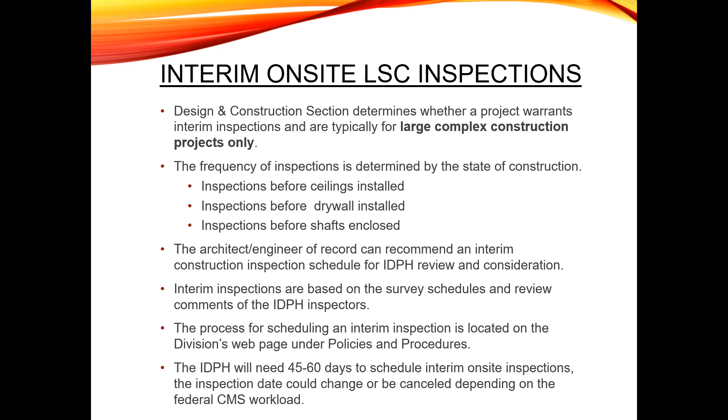So if we get a cert pack in here that has issues with it, they all need to be resolved. Now, it's case by case also. If there is a time crunch, we can look at how that impacts the cert pack review and the on-site request. We have made accommodations in the past for an emergency need, say an OR needs to be open, or an ED department needs another phase looked at, with this season coming in with COVID and the flu season impacting the ED departments at all the hospitals.

But before any occupancy can be granted, either temporary or final, all the issues must be resolved at the end, okay? I just want to make sure everybody understands that. Next slide.

Requests for inspection, that's kind of what we've talked about. The cert packs are reviewed for current forms. That's what Dave does. He'll look through it to deem it complete. He'll make sure that all the certifications have signatures. We do not accept typed names as if we're typing on the computer, but we are accepting electronic signatures, such as DocuSign. I know there's a few out there. As long as it's an electronic signature that's generated, we would accept those on documents. If there's any question, Dave may call and ask, just to make sure.

After the inspection has been internally scheduled, design and construction will contact the project architect or engineer to set up the inspection date and time. If there's a balance due for a fee, say the change orders exceeded what the fee was originally, there could be a balance due. We potentially could do an inspection, but no occupancies will be granted until the review fee is received by the department. Okay, next slide.

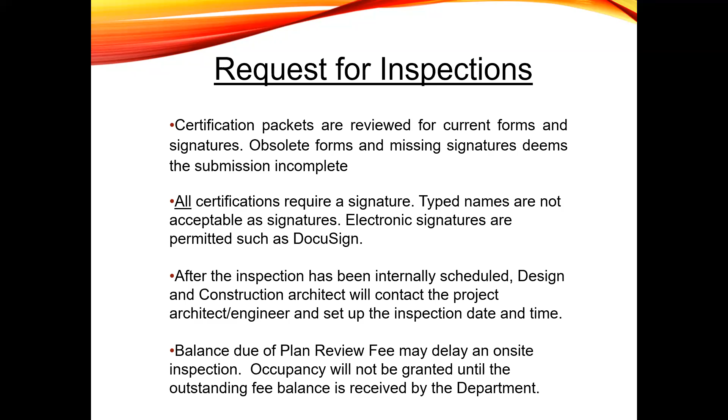Project inspections for licensure are all announced. Only the Centers for Medicare surveys at hospitals are unannounced. But we in licensure always announce our inspections because we want as many people there as we can have, from the contractors to the architects. Who should be at the inspection? It's not required, because we can't mandate anybody to be there, but certainly the owner, architect, engineer of record, the contractor, and any subcontractors.

After the on-site inspection is conducted, a letter would be sent to the architect or engineer outlining any deficiencies that we may have found on site. And we have to have that letter out within 5 working days. Most of the time, the corrections are made by the time we get back to the office, if it's traveling from Chicago. So you send us an email, and the letter may not go out if you've taken pictures, depending on what it was.

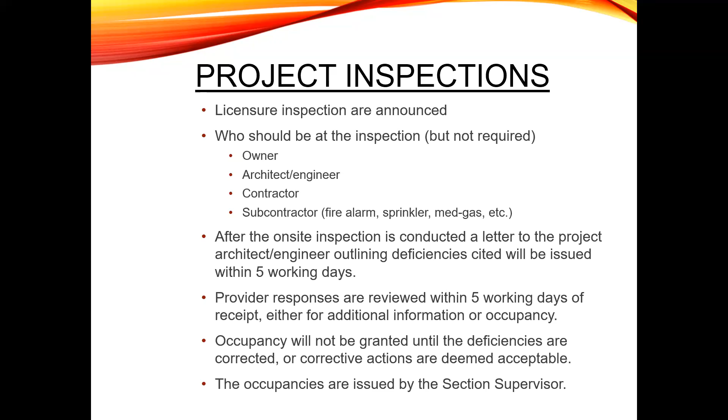If you have a work order, change order, something that you can forward to us with photographs, we would accept those. The provider, if you got a letter from us outlining deficiencies, have it returned back to us within 3 days or 5 days. Occupancy will not be granted until all the deficiencies that were cited during the inspection are corrected. Occupancies are issued by the section supervisor, so Laura would deem everything complete and tell Dave to issue either the temporary or final occupancy. Next slide.

Temporary occupancies, this is a pretty easy one to go by. Some of them have many temporary occupancies on a project, but they're typically issued for phased projects. Each of those phases must be in full compliance with the licensing requirements, and that's one of those things that if phase 1 and phase 2 are complete, but 3, 4, and 5 are not, but the sprinkler system hasn't been done in 1 and 2, we cannot grant occupancy unless the sprinkler requirements are met and the fire alarm requirements are met. So I just want to make sure everybody understands that.

Most jurisdictions also would be looking at that too if they're trying to grant occupancy. The design and construction side must receive and accept the temporary occupancy checklists, and also the same thing for the final occupancy. It will be determined if an on-site inspection is required. So it would be Laura or myself looking at something and deeming it, do we need to go out and look at this if it's a first phase, second phase?

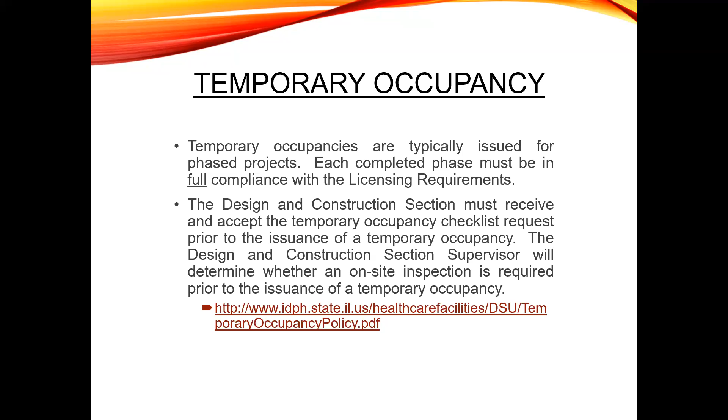I will tell you that if it's a multi-phase project, we typically like to try and go out on the first phase so we can kind of see how everything's flowing during construction. Then we may be able to skip a couple if it's non-patient care areas. We may be able to skip an area and then come out on phase 3 or 4. We do like to see patient care areas for temporary occupancies, just so you know. Next slide.

The facilities will be surveyed under, of course, the NFPA 101 Life Safety Code. The 2012 edition is still what the Centers for Medicare and Medicaid has established. There may be talk in the near future of them maybe looking at upgrading to another code year, but that has not been put in writing yet, so we're still waiting on that. So certainly buildings and additions that were built before July 5th of 2016, and that date is when CMS actually adopted the code, and that's why we then as the state adopted the same 2012 edition.

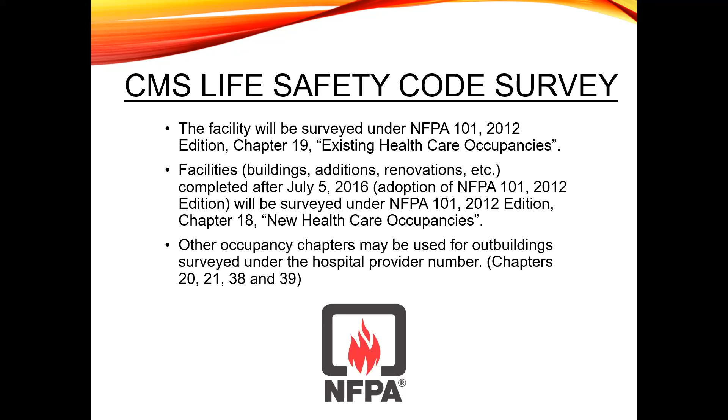So other occupancy chapters that may be looked at during federal surveys for outbuildings, there could be an ASC that's tied to the hospital. So we would look at chapters 20 or 21, depending on how new they are, and also chapters 38 and 39. Next slide. These are just some of the things that we look at when we do our document review and our walkthrough of the building. We do look at fire drills all the way through the fire damper inspections and documentation. We don't need to go through all of these, but all the facilities usually have these that have kitchen hood suppressions. Next slide.

One of the larger things that's out there that does take a little bit of time is the emergency preparedness, where we require to sit with whoever is in charge of the facility's emergency preparedness documentation. So we'll sit and make sure they have all the four main categories: the risk assessment, policies and procedures, the communication plan, which is a big one, and training and testing, which is another big one.

We're finding that a lot of the smaller jurisdictions, smaller county hospitals, the critical access hospitals, find it more challenging to do training and testing because they don't have the size of facilities that are around in a larger populated area where they can do training amongst a bunch of hospitals or groups. Appendix Z is where all the emergency preparedness is found for Centers for Medicare and Medicaid. Next slide. I have a couple slides here with some scoops of information.

The provider is fully responsible for all compliance with the Life Safety Code. IDPH conducts a sampling of regulatory requirements during a Centers for Medicare and Medicaid survey. We cannot get above every ceiling tile. We certainly cannot check every door, every fire-rated damper, shafts, due to time constraints and also staffing limitations and how long we're actually on site.

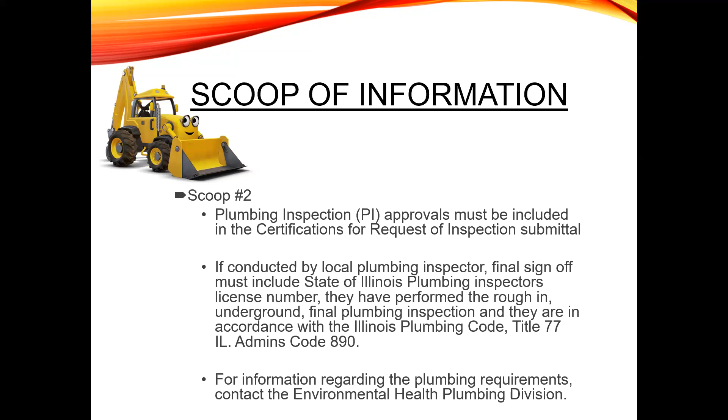accept that. However, sometimes you may have overlap where an Illinois state plumbing inspector from IDPH Environmental Health may also be on site, and they may have a separate set of documents. And we have had challenges with that. Many of you know that we do, and we have tried to work through those with Environmental Health as best we can. So that's on a case-by-case basis. If I need to get involved, I will ask Environmental Health to step in with their comments if something does not seem correct on an Illinois state plumbing inspection report. So let's go to the next slide.

Next slide, we're going to go into some of these, and many of you have probably seen these in the past. No facilities were named in these photos. It's just observations that we have seen over the years to let everybody know what we're looking at when we do federal surveys, issues that we note during walkthroughs, stuff like that. So we'll get into the first slide.

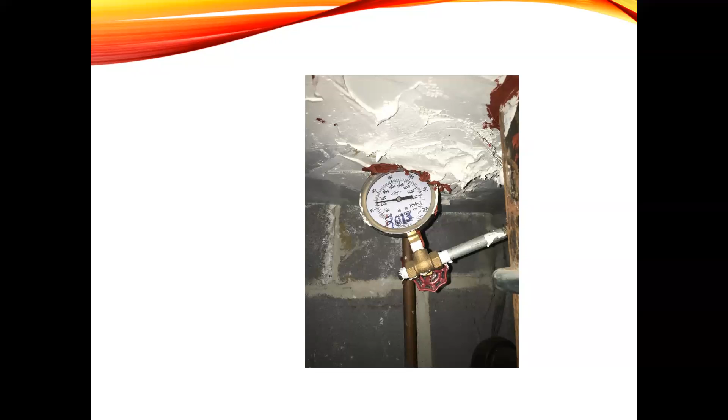This slide was actually taken from a failed 3-year sprinkler test, because over time the discharge port was getting less and less. I mean, the time was increasing to get water out, and then it became a trickle. Well, their internal inspection of the piping showed this. So this is always a concern with older systems, buildup inside. Next slide.

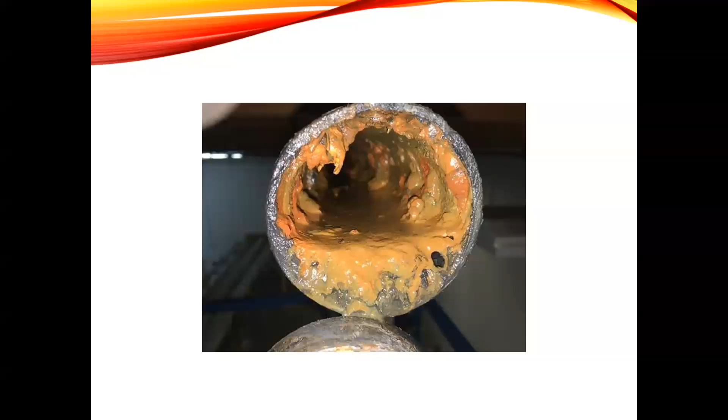This was one that was actually at an assisted living facility. If somebody sees this at a facility, we try to train any providers. If they see this, please let maintenance know, because it may not be accurate anymore with smoke detection at the ceiling because it's hanging down from the ceiling. It may delay alarming the building.

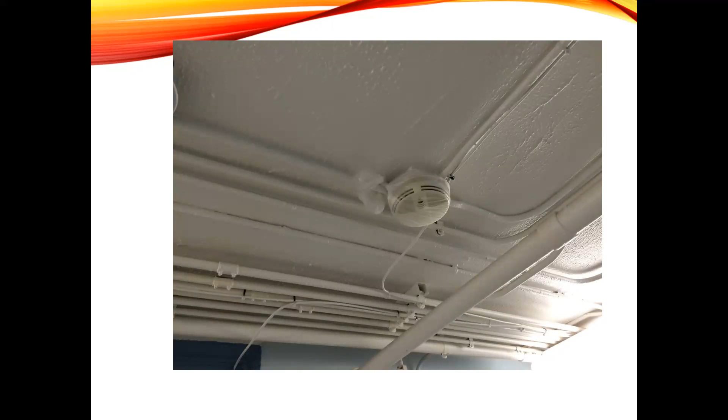Next slide. Construction project with an exit door to nowhere down the side of a hill. That's always a problem, and that's one of the things that we actually review when we do project reviews: we're trying to see how the path of travel for emergency exiting is reworked during a construction project. So that is something we would look at, but that's certainly a concern, and that door was actually an active exit.

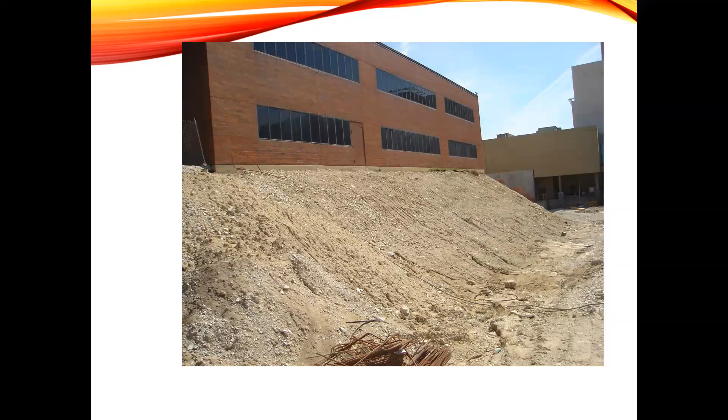This is something we would see actually in a final above ceiling inspection. And to be fair on this slide, when this picture was taken, they were working with the fire alarm, installing the fire alarm, and also some of the electrical wiring. They just haven't put in all of the final covers yet. But this is what we also note when we're doing the final above ceiling inspections. Next slide.

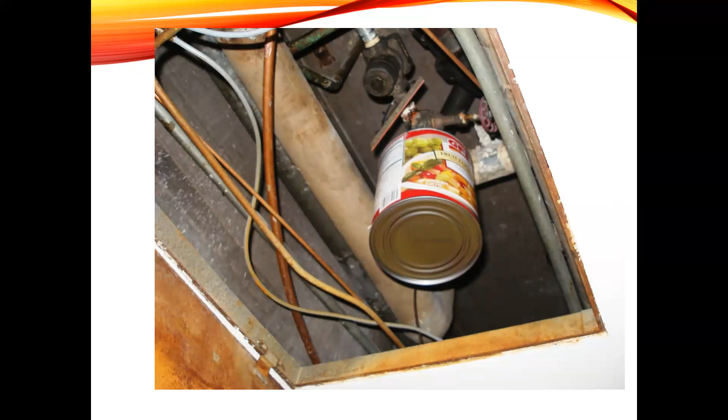Next slide. The GFS can, it's a drip can above the ceiling. If it's dripping and it's on the ceiling, they need to correct or check that valve, replace that valve. We do see that occasionally.

Next slide. We just had a unit fire in a skilled nursing facility where one of these caught on fire, and this is not the facility, but you can clearly see what potentially happens. The buildup, they never get in there to clean those out, and look at all the garbage that's in there over the years.

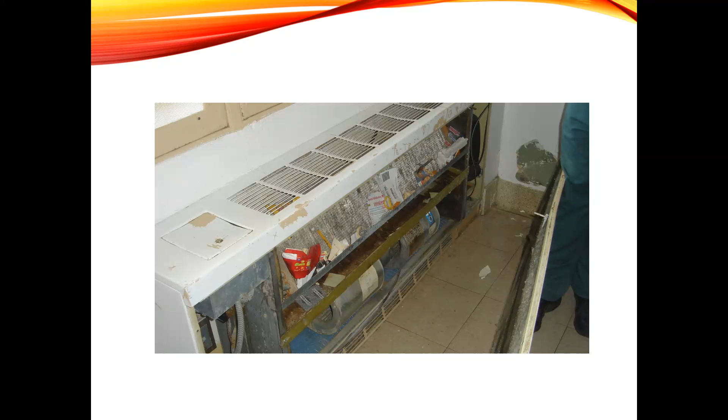Next slide. Storage in stairways, not acceptable. Next slide. Including the post office cart cannot be chained underneath the exit stair. Next slide. Some sprinkler items coming up here.